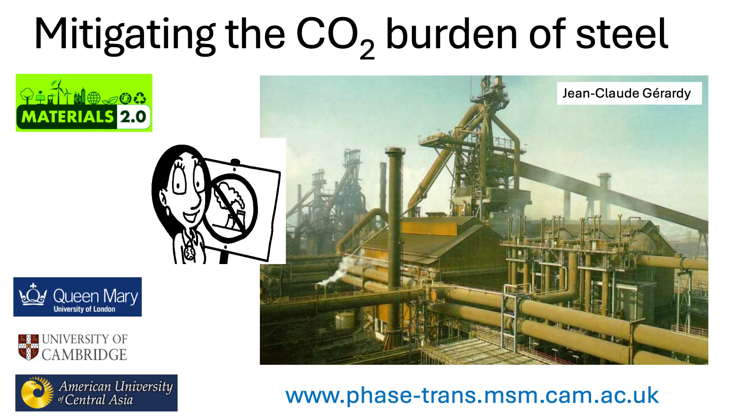So, first of all, thank you all for surviving to the last lecture. And I have to say that I've really enjoyed the talks so far and learned a lot from the different talks. And there's a lot more I'd like to discuss during the dinner. So, I have a passion for steels, and I've been researching steels for 55 years now. Okay, so I'm much older than probably any one of you in this audience.

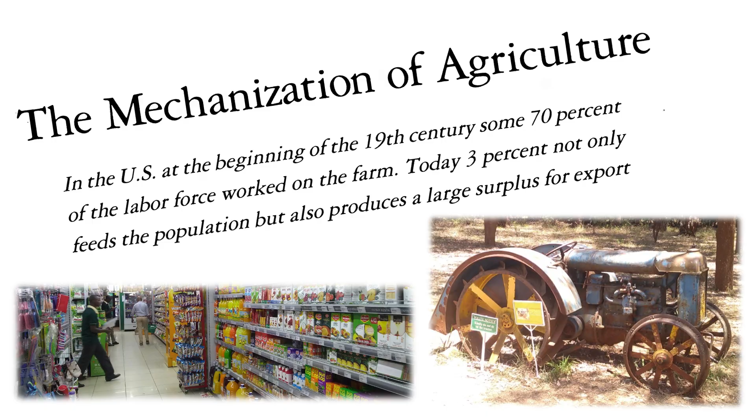And I was quite moved by the talk that Igor gave, where the motivation for his work was that there's roughly 700 million people who are malnourished. But because I'm very old, I remember the time when there were literally millions of people starving to death. And the thing that changed everything was steel. The mechanization of agriculture completely changed the production of food. So we can now feed 8.1 billion people without any starvation ever being reported except in conflict zones.

So the point that I'm making is that if you think carefully, you cannot survive without steel. And I'll give you several examples of this. Absolutely everything you do depends on steels. Your mobile phone, your manufacture of fertilizers, etc. Having said that, I'm going to surprise you by saying that I would like a dramatic reduction in the amount of steel that we use, because we are using an indecent amount of steel every year, about 2.5 billion tons of steel.

And I'm going to show you some magic. I want to show you a method of reducing steel consumption by 25% within the next 4 years, without causing pain to the quality of life that we have or to industry. And I'm not asking for a single pound of funding for this. This does not require research or development.

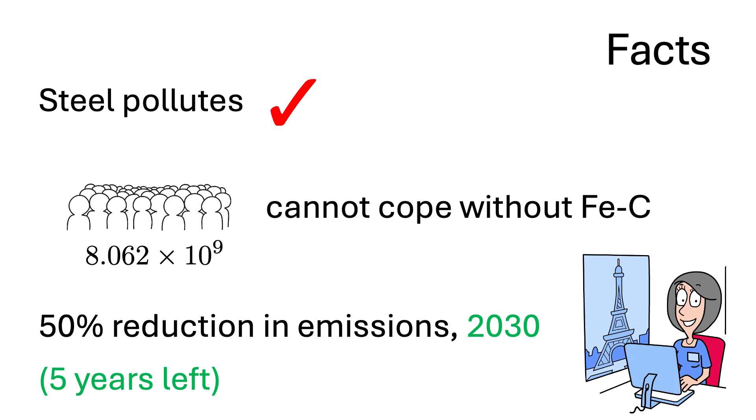So we can take it for granted that steel pollutes and that we cannot cope without steel. The Paris Agreement, which is a very sound agreement, says that we need 50% reduction in emissions by 2030. That 2030 is not far away. And if we don't do this, then the poorest people in the world will suffer the most, because you'll get flooding and all sorts of issues. So that's the case, and there is no time for research and development.

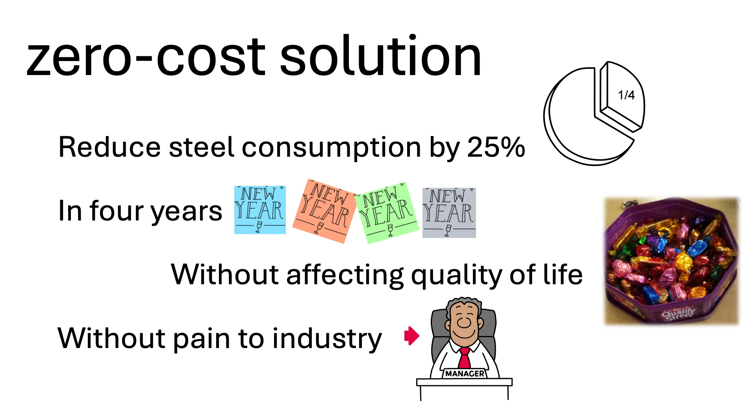We use 2.5 billion tons of steel every year. I'm not suggesting that all the ideas that have come out today and elsewhere are not worth investigating, but they simply will not manage to change anything within the timescales required. So I have a zero-cost solution to reduce steel consumption by 25% in 4 years without affecting the quality of life or causing pain to industry. How can we do this?

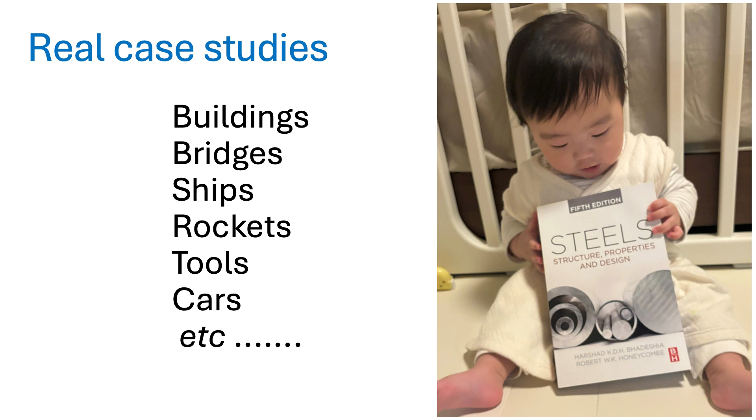So I'm going to show you some real case studies involving all these things which take up steel in large quantities. And this is not just a hypothesis. These are real buildings which have been put up in a better way so that we save steel. And it's all written up in this book here on steels, which even the youngest in the world admire.

Now, the first case study is from Brazil, because I've worked with CBMM for a very long time. Back in the 1960s, there was an invention in Sheffield which should have won the Nobel Prize. If I was there at the time, I would have nominated 3 people for a Nobel Prize, because the addition of a very small quantity of niobium, and there was no niobium market before that, 0.03% or less of niobium into steel dramatically changes its properties. And we call that microalloyed steel.

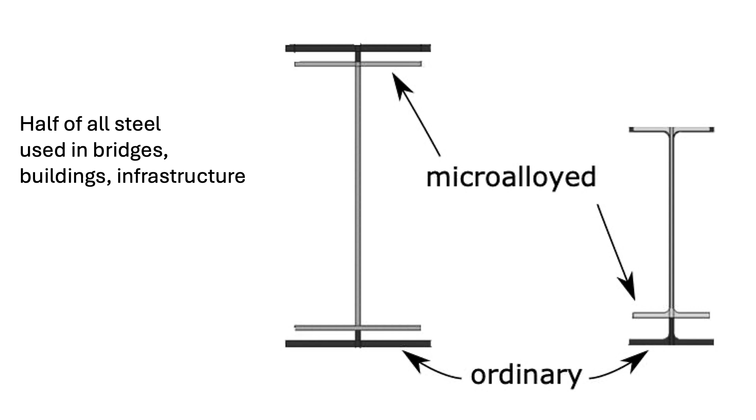Microalloyed steel here. And what CBMM did was it did a beautiful study. This is the ordinary sort of I-beam that you would use in the vast majority of constructions even today in the world. But if you use microalloyed steel, which is stronger, then you reduce the amount of steel that's needed by something like 22%. So what is the catch? Why don't we use microalloyed steel all the time?

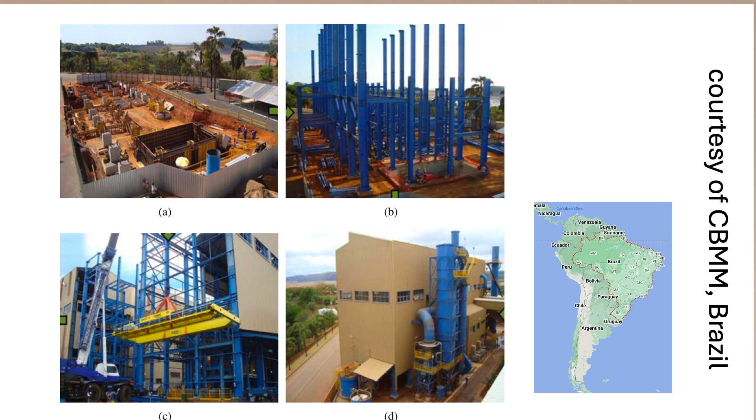This is the actual building that they put up, and I've seen this myself. Okay? And since this was put up, there have been several others, even taller buildings, because originally when this was put up many years ago, you couldn't buy microalloyed steel beams which are very tall, but now you can do that, okay? All due to CBMM in Brazil. And look, common sense, absolutely common sense.

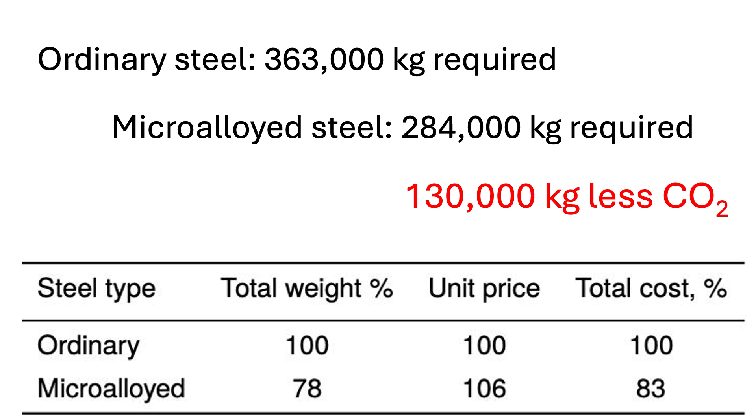And I will go through several examples to show you that we don't need to do research and development. We already have materials which are far better than what we use. But of course, we are not using these better materials, and I have a solution right at the end to show you how to force that change.

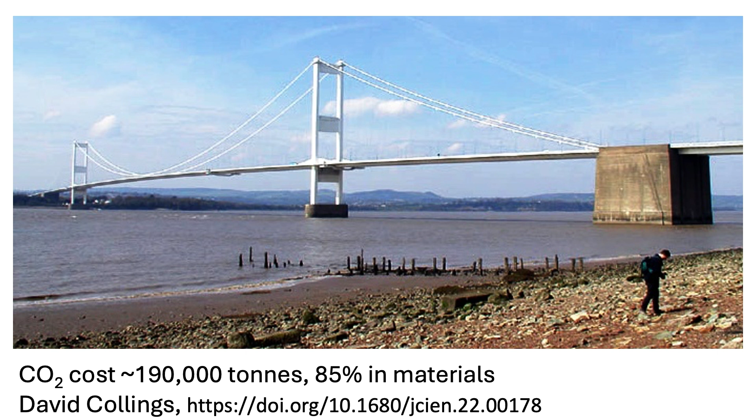Okay, this is a bridge across the River Severn, the first bridge which was built. And there is a cost in the construction of all these objects. And a colleague of mine, David Collings, calculated the cost of putting up this bridge, which includes the cost of concrete and of the steel and so on. So this is a long span suspension bridge. And people like long span suspension bridges, even though there isn't sufficient traffic here to warrant such a wide span.

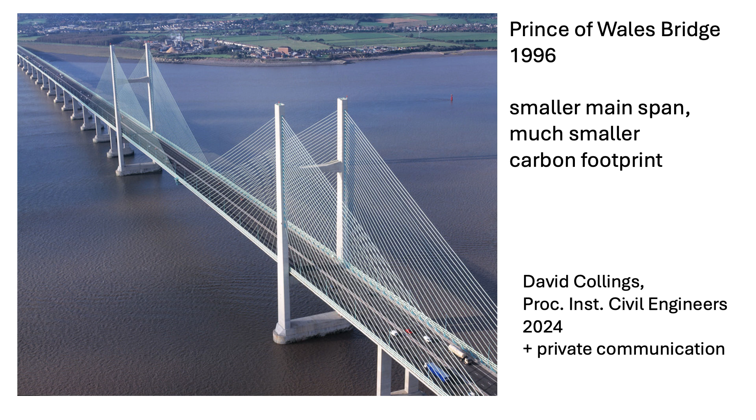So David Collings then looked at the second bridge, which was the Prince of Wales Bridge, which was built across the River Severn here. Much lower carbon dioxide cost, and the span underneath is wide enough for the sort of shipping traffic that you get. And by having all these pylons and the steel, you actually save a huge amount of carbon dioxide. So this is engineering, okay?

So proper engineering, right from the beginning, you will save a lot of CO2 and reduce the amount of steel and concrete that is used. So the foundations here don't need to be as robust as the foundations for the suspension bridge that we had. And unfortunately, people want to get the longest single-span bridge.

The longest single-span bridge is 2 kilometers unsupported, which is in between Awaji Island and Kobe in Japan. And the latest one is going to be across the Bosphorus Strait in Turkey. But you do not need that sort of a span, okay? They just look nice.

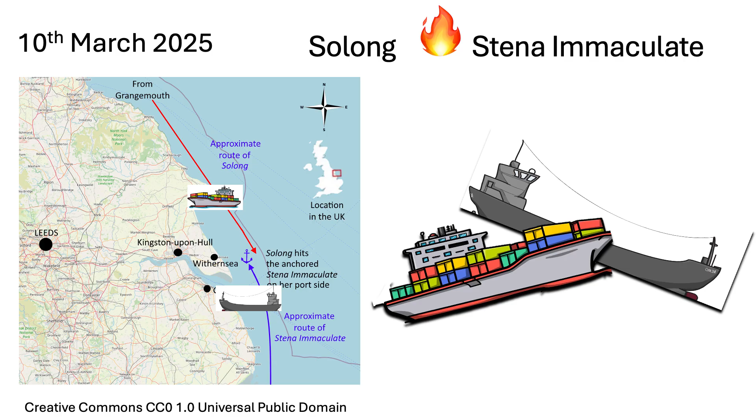Now, here's a very topical story which I've analyzed in detail and paid a lot of money of my own to obtain the license for the images that I'm going to show you, okay? So this was a collision between 2 ships in the North Sea, and one of them was a tanker and the other was a container cargo ship. The tanker was completely stationary. So I don't know how modern technology failed, but the moving cargo ship hit the tanker.

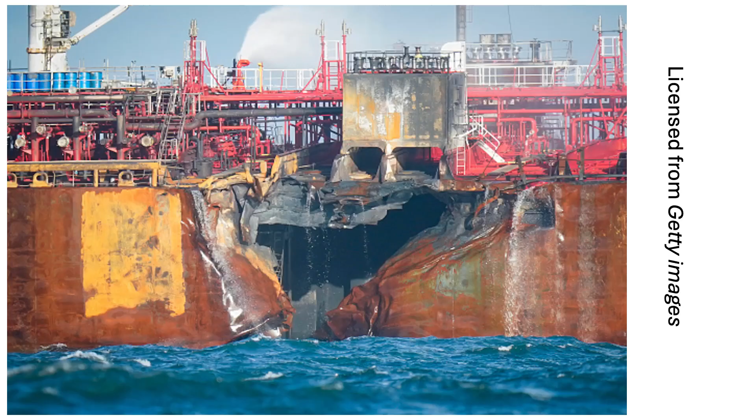And this is the damage caused on the tanker. And I want you to look at this very carefully, okay? It cost me about £200 to get the license for this image. There is massive damage, okay? But look at how the steel has deformed, right? And this is the reason why, when you have quite a severe collision in a car, you're able to walk out of the passenger compartment with very little damage, okay? Because steel can deform and plastically absorb energy.

And I enjoyed your talk on machine learning as well, because I myself use machine learning. But I have to say that carbon nanotubes and graphene, if you break them, they absorb zero energy. All the energy is recovered, all right? So you cannot ever make a safe engineering material just out of carbon nanotubes or graphene. I always have a go at graphene because they say it's 200 times stronger than steel, but actually it isn't.

Okay, so look at this damage. One more thing you will notice is that the ship is still afloat, right? And I'm going to explain why. So it's a combination of steel, and here is a rough calculation that I did, which you could set for undergraduate examinations, right? To show you that, look, these are numbers that I've got from the interim report from the Marine Accident Investigation Branch in Britain.

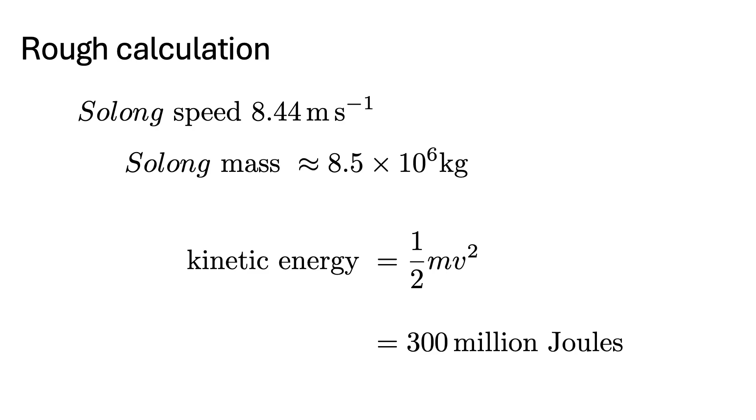The Solong was moving at a speed of 16 knots, which I've converted to meters per second, and it weighs about 8.5 times 10 to the 6 kilograms. So you work out its kinetic energy, and it comes to 300 million joules. So just imagine how many chocolates that is, okay? 300 million joules. So the collision has to absorb that much energy, right? And the steel will be absorbing that energy.

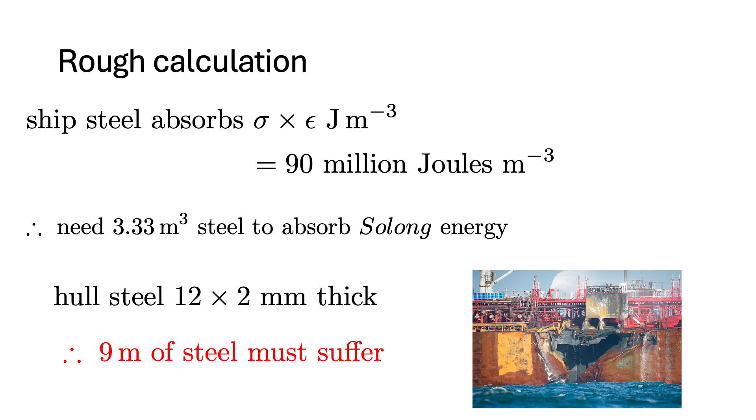So if you do a rough calculation of the strength of that steel, it's about 400 megapascals, and the plastic strain it can tolerate is about 0.2. Then the steel absorbs 90 million joules per cubic meter, right? Per cubic meter. If I then convert it into area, and noting that the hull of the ship is 12 times 2 millimeters thick, I'll explain the two later, then about 9 meters of steel will be completely damaged, and that's roughly the right scale here, okay? There is no other material in the world that would have survived that sort of damage and kept the ship still afloat.

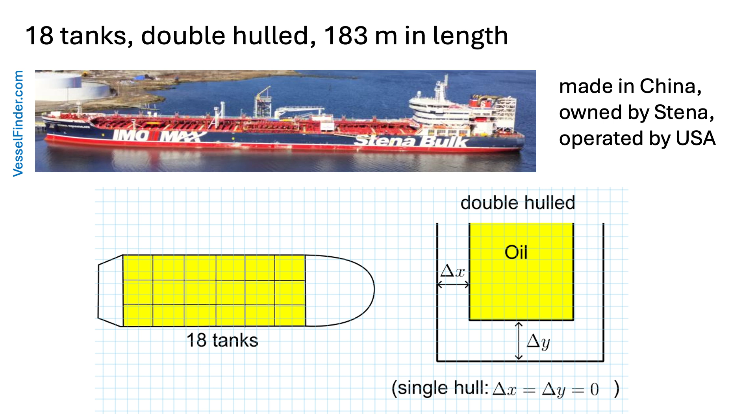Furthermore, it has a double hull, okay? So that's why I multiplied the thickness of the steel by 2, which means that there is quite a lot of safety built in, and that is a regulation required for tankers which are going to get anywhere near territorial waters. It does mean that you use twice the amount of steel, which is not a good thing.

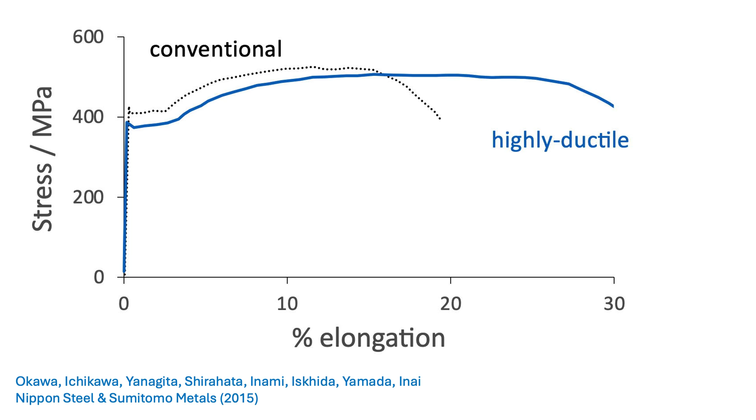Now, one of my former PhD students, Kazutoshi Ichikawa at Cambridge, he's now at Nippon Steel. He and his team designed a new kind of ship steel which is much more ductile, so it can absorb a lot more energy. Now, this is a very easy test to show, but it's not at all good enough for anybody to accept your steel for a ship, because there are so many requirements, all right? You have to be able to weld it and lots of parameters.

So it has to be strong, but not too strong, because then it won't be able to deform and absorb energy in a collision. This is really important. You've got to be able to join bits of steel together, and it has to be tough. That means when you give it a knock, it mustn't fail in a brittle manner. And you've got to be able to mass produce it in the right sort of shape.

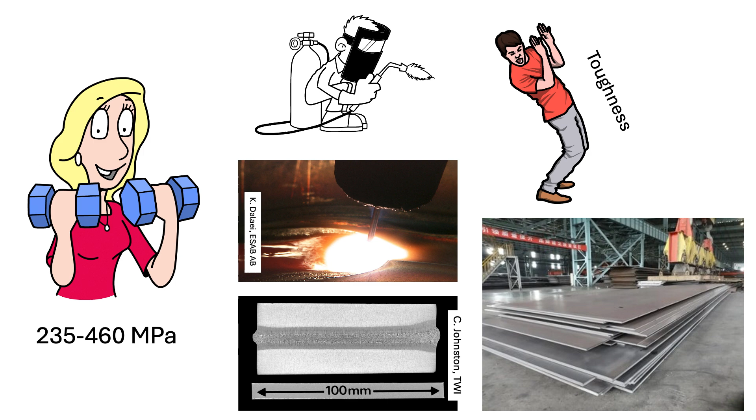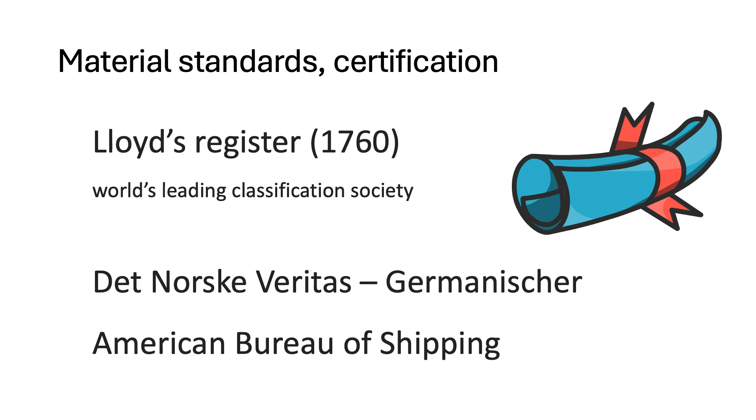Furthermore, you have to go through all the specifications, agencies, government agencies, shipbuilding authorities, and so forth, to qualify a steel. So the team that developed the steel spent many, many years coming up with the solution. And I'm going to show you the large-scale tests that have to be done to prove it. So first, this is the conventional steel that's used for the double-hulled ships.

And this is a massive sort of indenter which goes into the material. You will see that it fractures at the top, okay? In which case you would either leak oil or water would get into the ship. So you have to do tests which are amazing in their scale, all right? So this has broken, and now I'll show you the newly developed material. The same sort of indentation, same sort of depth, and nothing will happen to that steel. Okay.

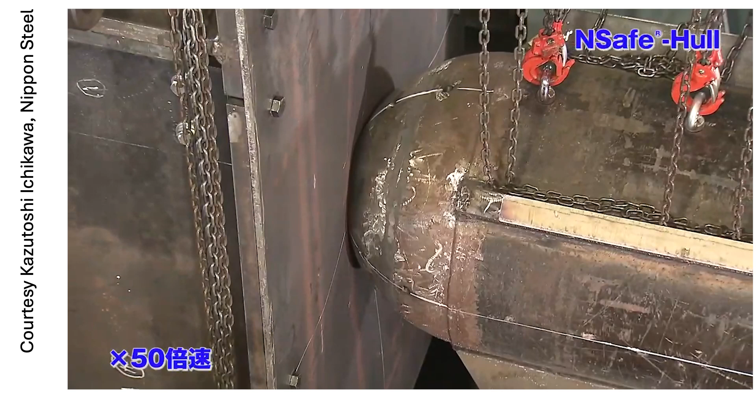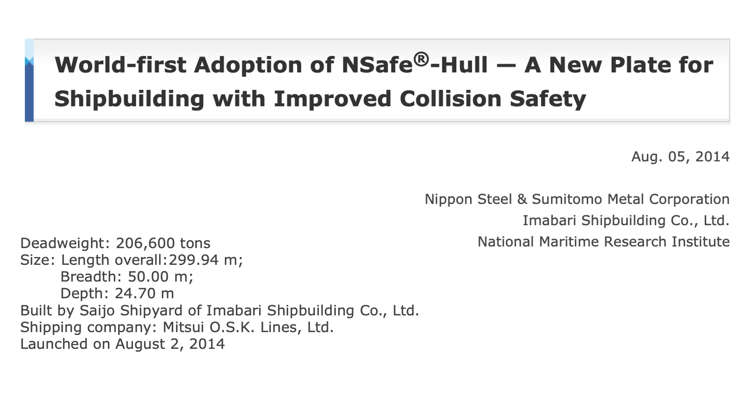Back in 2014, this was used to construct ships. At the moment, just bulk carriers, because the regulations for tankers still are not adapted to the new steel. 2014, that's a long time ago, okay?

And that means you cut the use of that steel by a factor of 2. Now, this steel is going to be more expensive because it's very nice. But by using half the quantity, you actually pay less in total content. So it's now in at least 20 or 30 ships, and hopefully it will expand further.

There are also new technologies for making things. All of you will have played with Lego at some stage, where you make a layer, then another layer in a different shape, and build a nice object. That's exactly additive manufacturing, where you build up a component layer by layer into however complicated a shape you want, including internal angles.

This is a particular tool used in the automotive industry, and that's the new design made by additive manufacturing. It uses 70% less steel, and it looks completely different, because additive manufacturing lets you develop a configuration optimum for the application, whereas here you'd have to machine it, and machining has its limits. So, 70% less steel used.

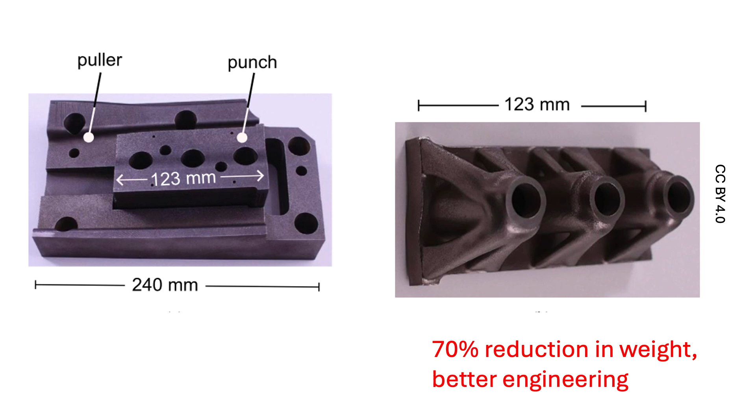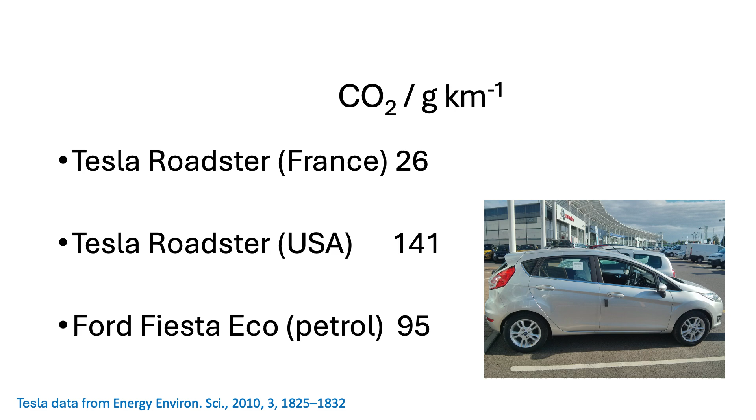And this is my car, which emits less than the Tesla Roadster, because my car is 1,100 kilograms, whereas these cars are on the order of 3,000 kilograms. Now, if you include the CO2 cost of actually making the car, then I win by a factor of 3. And the amount of steel that goes into cars actually hasn't reduced, even though we have amazing developments in automotive steels — that's because of safety.

The safety regulations have increased enormously, so even from side impact you have to protect the passenger compartment. So electric vehicles are not actually going to be the complete solution, because the cars being focused on are just too big — including, for example, the Tata Motors Range Rovers, which are ridiculously heavy, about 3,000 kilograms. Most people don't need a four-wheel drive to take their children to school. So we can save a lot of steel by making proper and careful choices in what we buy.

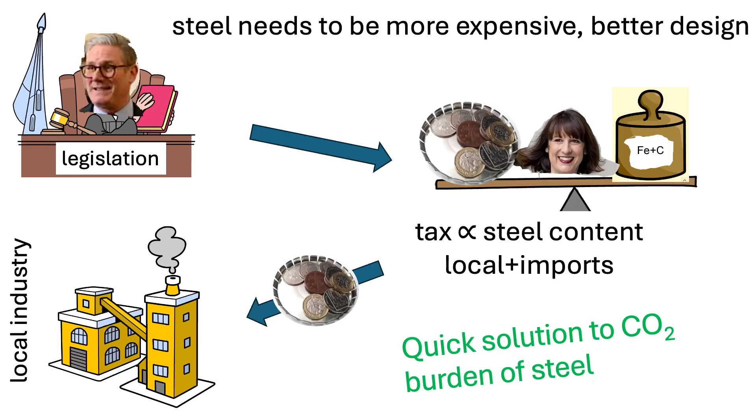So here is what I propose, and I've said this on the BBC as well: we need legislation, because without legislation nothing actually happens rapidly. There's a really good example of this — the CAFE regulations introduced in the USA to improve the efficiency of cars have worked amazingly. The amount of fuel a car uses now is a lot less than before the CAFE regulations.

And the legislation should be as follows — exactly what was in one of your slides, I wrote it down — it's the carbon border adjustment mechanism. We need that for steel. So anything you import or make locally, you charge a tax according to the steel content of the object you buy. And furthermore, that tax income doesn't go into Rachel Reeves' treasury, but goes to industry to help them get better technologies.

There's another experiment in progress on a very large scale, which I have to thank Donald Trump for. We've had some things said about him, but this particular idea is very good: 25% tariffs on steel imports into the USA.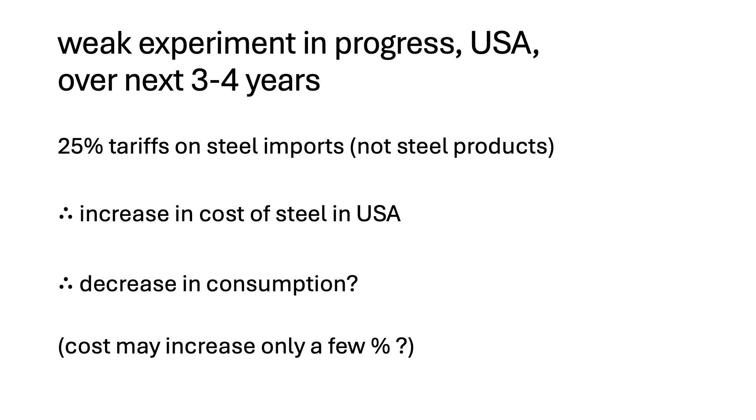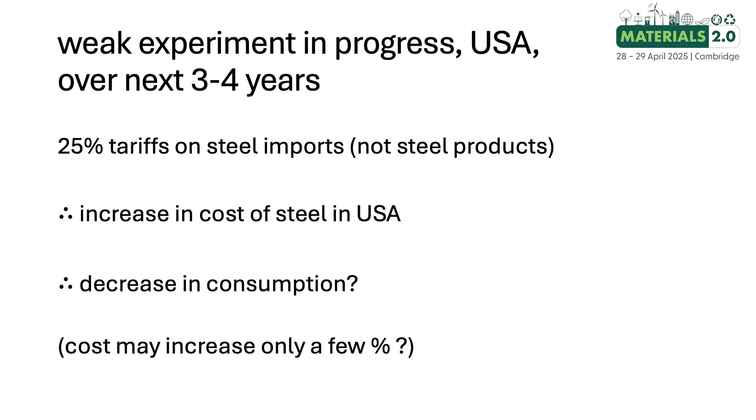Now, already the cost of steel in the US is rising because of this. Although the rise is still within normal seasonal fluctuations, I'm monitoring this to see whether the increase in steel costs in the US leads to a decrease in consumption. Donald Trump will be there for at least 4 years, so I hope the 25% tariffs persist on steel imports so that I can have a real experiment to show you that this method actually works in reducing steel consumption rapidly.

That's all I have to say. Thank you.